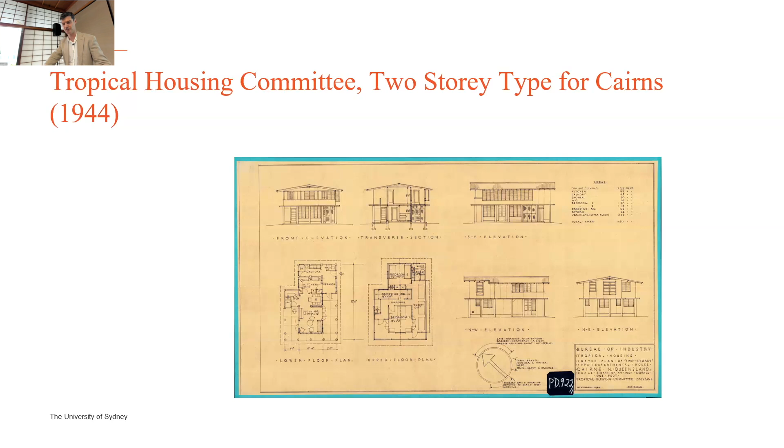This continued the racialized acclimatization agenda that came to the fore in the early decades of the 20th century, with the implementation of the notorious White Australia policy that placed greater weight on building construction and scientific research. The historian Warwick Anderson recently outlined that in the 20th century, modern and tropical were no longer antithetical, and that culture and racial assumptions about the tropics were changing due to technology.

The 1943 Tropical Housing Report placed its faith in scientific method to modernize and climatize housing and suggests the prefabrication of building and equipment units would create improved houses at lower cost, provided there was not undue emphasis on eye effect or patent protection, and that climate was taken into account.

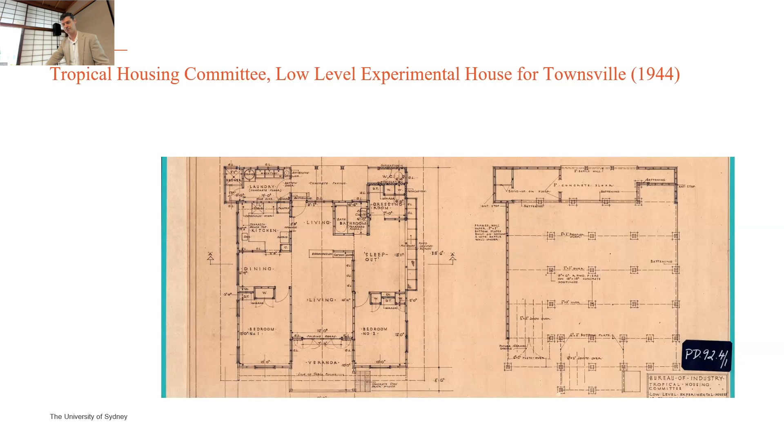Prefabrication is also championed by the Commonwealth Housing Commission, chaired by Leo O'Connor, who also formed part of the Queensland Bureau of Industry's Tropical Housing Committee. The commission also included prefabrication evangelists like Walter Bunning and architect Charles Howard. And Howard in 1943, while a member of the Commonwealth Housing Commission, actually suggested the creation of the experimental building station. It was really Howard who set in train that process, modeled along the lines of the Building Research Station to test and develop prefabricated buildings.

The 1944 report, the CHC's final report, expected that the scale of output required after the war, the lack of skilled labor, and the expanded use of factory production would all stimulate the reorganization of the building industry and increase the need for prefabrication. They considered prefabrication a viable solution for tropical and rural housing.

And what's interesting, I think, is that the proposed designs for standard houses at the back of the report in the southern part of Australia made no mention of prefabrication. Those for the tropics, subtropics, and rural areas were all expected to be prefabricated. So you can just see this up here. It's just notes. It's like based on prefabricated modular framework. So just that small note, I think, is of interest.

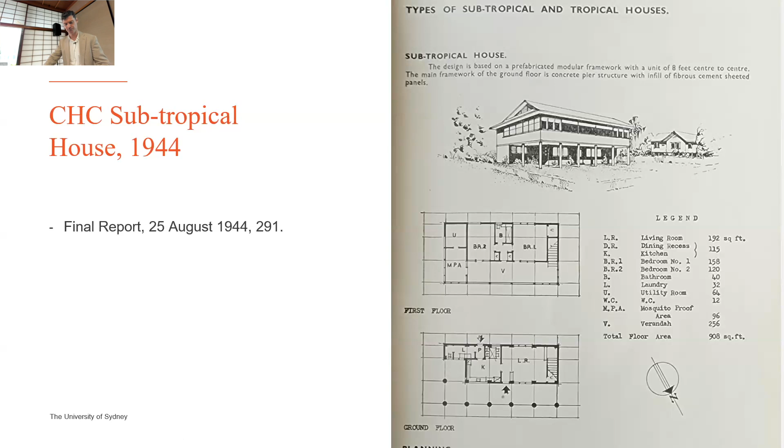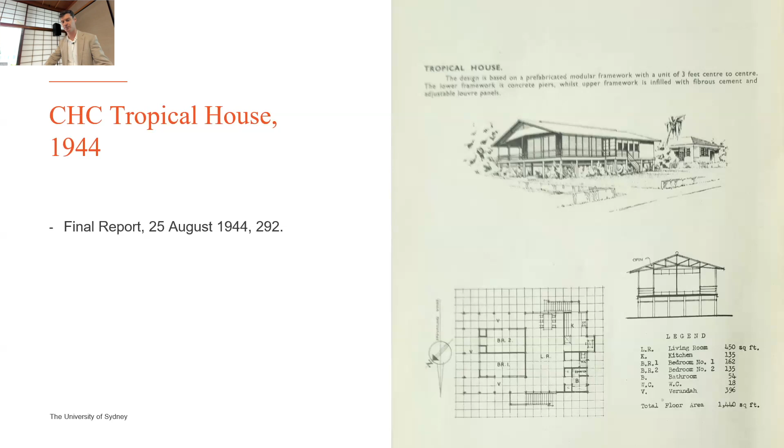What's surprising is that though the Queensland Bureau of Industry's work up in Queensland foreshadowed later work by the Commonwealth Experimental Building Station into developing climatic design factors for housing, and consisted of some of the more progressive members of the Queensland architecture profession, such as E.J. Weller, and even they roped in Carl Langer to do some of those plans that you saw earlier, they didn't place the same emphasis on prefabrication. Langer's subtropical housing did suggest, for example, the possible use of prefabricated building components, but his work seems to be much more about climate and lifestyle than on construction per se. So a bit of misplaced enthusiasm.

E.J. Weller, Jim Weller, who was at times the garrulous nominee of the Queensland chapter of the Institute of Architects, would have at first seemed to be a potential advocate for prefabrication, but if anything, subscribed to the view of the architect as a skilled tastemaker who'd facilitate a modern lifestyle without requiring major reform of the construction industry. An architect who trained in Sydney with Burley Griffin's associates, Weller was also a member of the Institute of Sanitary Engineers and had done a study of that.

In fact, some of his articles in architecture are worth looking at again. There's one that really goes into climate and health. And I think actually someone needs to put that in play with Carl Langer's work. I just discovered it the other week. And I think that'd be quite interesting.

And he was a proficient self-publicist who garnered considerable local attention in the press in the late 30s for densifying inner city sites in Brisbane and Townsville with small-scale apartments, such as these ones here. If anything, Weller highlights the interest in developing a local culture of architecture among Queensland architects and a mistrust of universal approaches. He was alarmed by the Commission's announcement of an experimental building program and thought it was rushing into solutions without probing the economic significance of any investigation.

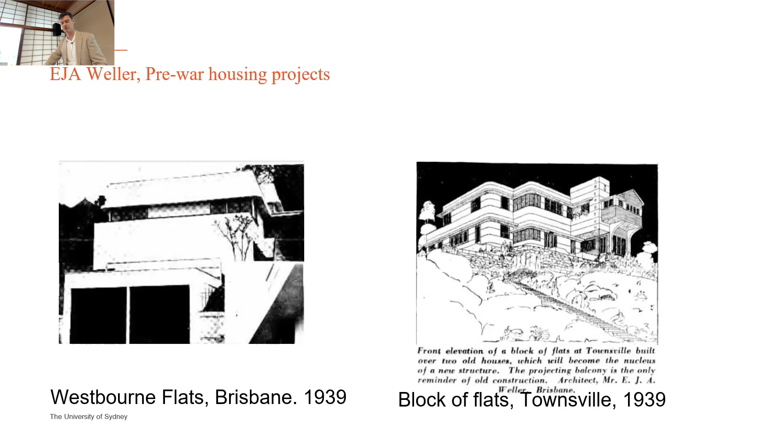Issues he thought relevant included local availability of materials and production potential, and the adaptation of war industry, at least in part, to the production of housing components. This is in 1943. Weller feared that prefabrication was being forced on the public and that few people would trade a loss of choice in the dwelling for a small saving in construction cost. Far from being a permanent benefit to civilization, as Bunning had claimed, Weller thought the rush to experimental housing solutions was misplaced enthusiasm.

But where did it kind of come about? Well, prefabricated houses were accepted by government as a quick fix solution to accommodation shortages. In Darwin in 1949, the Administrator of the Northern Territory, Arthur Driver, gave his reluctant support to purchase 100 Hawkesley houses, noting in a draft letter that "we do not like them, but we can see no other way clear to obtain the necessary number of dwellings, and the project should accordingly have our and the department's blessing."

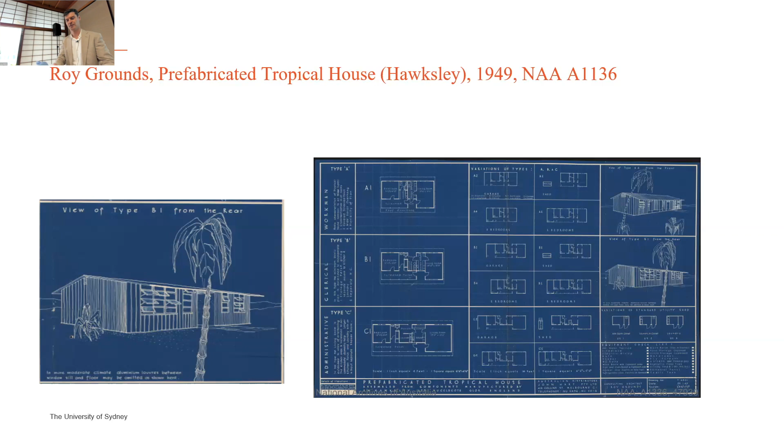End quote. Officials understood that the appearance of the buildings and the level of thermal comfort they provided were below what many in the community expected, but given the dire situation in accommodation, they were willing to compromise. And these are just some of the things in the file actually on the Hawkesley house. And here's another one. This was the Hawkesley house for Woomera.

Initially, the public also agreed. Hawksleys were also sent to Papua New Guinea, even though they were considered inferior to the other pre-cut homes, such as the R-type house, and weren't considered exactly ideal for tropical conditions. Their finish and appearance were acceptable, given the alternative of living in a makeshift dwelling.

One thing I think that's interesting, though, is that there seems to be little effort to galvanize public support for prefabs in Queensland and the Northern Territory. So while the Myer and Beaufort homes were displayed in Melbourne, and Harry Seidler's prefabricated House of the Future went on show in Sydney in 1954, I actually can't find any examples of prefabricated homes being displayed to the public in Brisbane, for example, during the 40s and 50s.

And even though there were exhibitions organised by the University of Queensland on the future of Brisbane in 1940 and '44, there was no mention that I can come across in the press, certainly, about prefabrication. There was a press article by the Minister of Housing in 1951 who pushed the need for imported housing, but it's unclear whether the public ever got to experience a prefab before moving in.

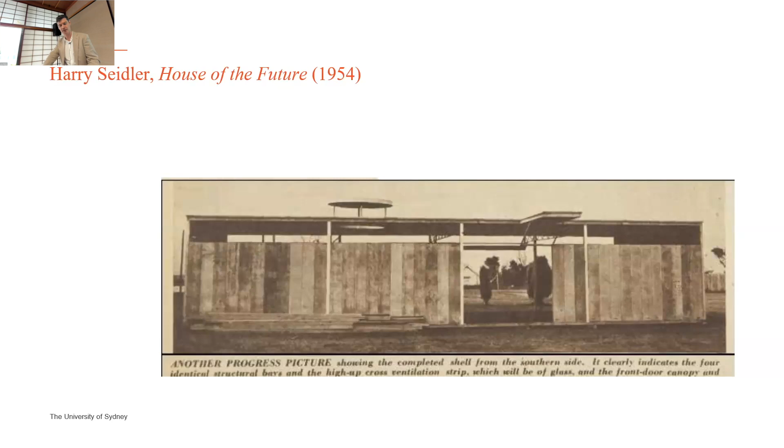So, disappointment. Many of the great plans for prefabricated buildings by state and Commonwealth housing agencies ended in disappointment. Certainly the claims that the factory-made houses would be cheaper and better performing failed initially to materialise. In 1942, Bunning had suggested that a prefabricated house could be built for £350, yet 10 years later, Hawkesley houses in Darwin cost £5,145. Even allowing for inflation and the cost of site work in remote locations, this was far above the standard cost of housing elsewhere at this time.

The importation of prefabricated dwellings from Europe in the early 1950s by the Queensland Housing Commission was also considered a debacle. The prefabs at Zillmere, north of Brisbane, became a battleground between state Labor and federal Liberal parties in 1952. There were accusations of poor workmanship, defective materials, and householders getting dysentery. Alans Vernooy, the son of the main contractor for the Dutch houses, considered the concrete Dutch house at Coopers Plains to be a housing debacle.

Some of the problems that emerged include poor site infrastructure, materials unsuited to local conditions, and poor workmanship. And I think this thing about site conditions is something that often gets missed in discussion. It's one thing to have the prefab house, but you often needed a contractor to actually set up the place, and that often created extra expense and trouble.

In 1951, in the northern Brisbane suburb of Zillmere, there was a development of French-made prefabricated dwellings for the Queensland Housing Commission. Well, there were issues about site infrastructure, and there were examples actually given of raw sewage being carted across the suburb and dumped into an open sewer where it built up and caused considerable health risks. Site drainage was so poor that the suburb was also considered a dengue risk.

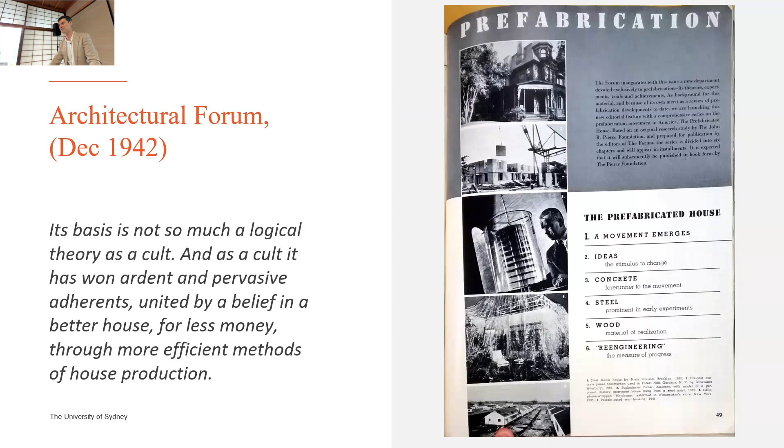Yeah. So I just want to preface this, that this research is really at its early stages, and I'm using this paper to test some connections that I hope to explore later on with more detailed archival work. And so there's a bit of a disjuncture between some of the images on my slides and the housing policy that I'm introducing, but it gives you a sense.

The Commonwealth Government's journey of reconstruction and nation building after the Second World War contributes to economic prosperity, and although the 1950s were punctuated by economic fluctuations, this trajectory during the late 1940s and 50s in part generates a political and wider social emphasis on house ownership as a method of economic and cultural securitization that inscribes itself in the national imagination.

The detached suburban house built with climate considerations and adapted to local environments gained momentum as the ideal housing type for Australian citizens, and by extension becomes adopted as arguably a defining attribute of Commonwealth citizenship and definitely a public fixation. In this period, the hazy notion of the Australian dream takes flight and becomes an ongoing magnet for cultural commentary, both affirmation and criticism.

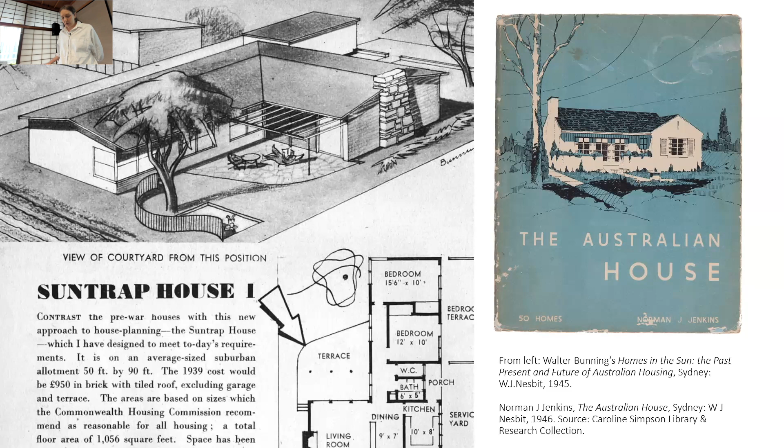This short presentation introduces the conceptual framework and key questions for a larger research project that interrogates the political narratives and motivations encircling the Commonwealth's involvement in housing research and provision in the immediate post-war period. This larger project aims to explore the colonial underpinning of housing histories and the political apparatuses behind the generation of housing ideals, and how this impacts design research undertaken on behalf of the Commonwealth and its dissemination into the wider architectural profession in subsequent years.

By situating the Commonwealth's directives to address the housing crisis emerging in the final years of the Second World War in the context of the growth of owner-occupied housing in spreading suburbia, the research aims to consider the relationship between housing and colonial emplacement, and how this emerged through government-sponsored construction innovation slanted towards domestic architecture.

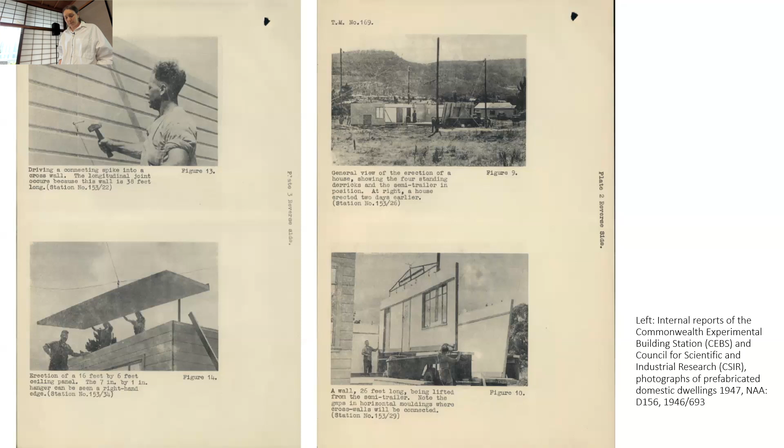What the broader project hopes to explore is the scale of involvement the government had in the adoption of house ownership as an aspirational aim, and how this possibly informed the design outcomes it produced. During the period from the late 1940s into the 1970s, the federal government both produced and financed a large amount of this type of suburban housing stock as part of public housing efforts.

However, it's important to note that the role of the nation state in the expansion of owner-occupied housing, specifically the level of its orchestration and interference in the widespread endorsement of home ownership aspirations, has been heavily debated by political and social historians such as Alastair Greig.

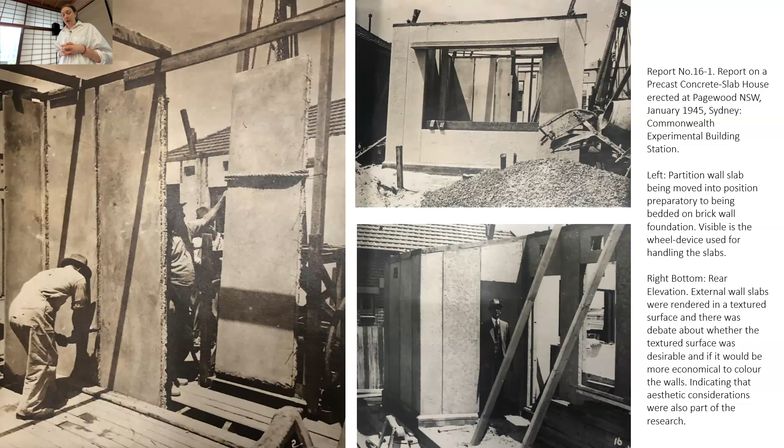But Commonwealth government policy did aim to encourage certain housing tenure types and the promotion of a mono-tenure system with owner-occupied at the centre, I suppose, undergirding these larger housing agendas surfacing from the Commonwealth, particularly from the mid-1950s onwards, with the renegotiation of the Commonwealth State Housing Agreement in 1956.

The Commonwealth Housing Commission was established in April 1943 to address the future housing crisis and the diminishing quality of Australia's housing stock. It operated as a commission over 1943 and 1944, set up with two rather broad primary aims: to present the housing position in Australia and to inquire and report on the future housing requirements.

Generated as one of three commissions of inquiry from the Department of Post-War Reconstruction that was established in 1943 with Chifley as minister, the others being the Rural Reconstruction Commission and the Secondary Industries Commission. The CHC was an accumulation of departmental recommendations and a real network of bureaucracy, namely the 1941 Interdepartmental Committee that advised on reconstruction, identifying housing as a major post-war concern stemming from the Depression.

The CHC consisted mainly of architects, and Orion has already outlined this a little bit, but John Scarborough Gawler, a former lecturer in town planning and architecture at the University of Melbourne, and Charles Vincent Howard, an architect in the Department of Interior. The Commission's executive officer was Walter Bunning of the later firm Bunning and Madden that practiced as a partnership from 1946.

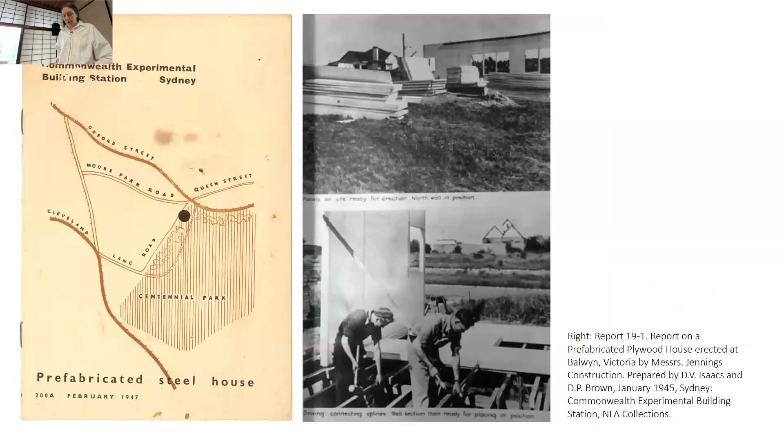As part of its recommendations, the Commonwealth Housing Commission proposed the creation of the Commonwealth Experimental Building Station, founded in 1944, set up to foster immediate and more experimental solutions for the post-war housing shortage, trialling cost-effective on and off-site fabrication methods and new construction technologies in collaboration with industry partners such as Jennings Construction and Stewarts and Lloyds.

A decline in traditional residential construction materials from the war-orientated industries meant that part of the CEBS's program was developing low-cost prefabricated steel and concrete houses as viable alternatives.

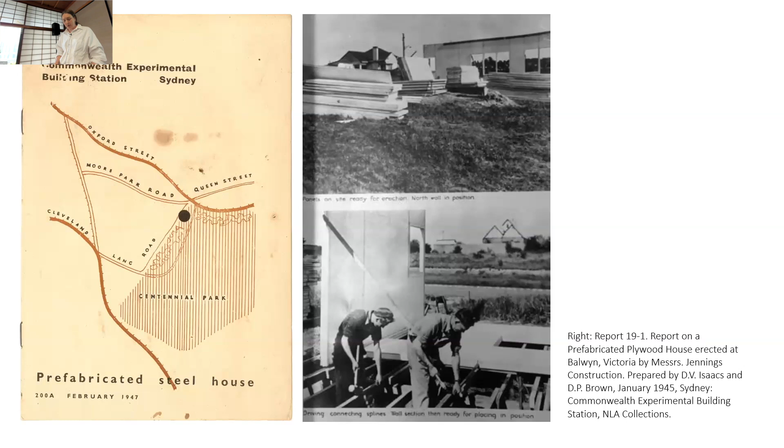By discursively examining the Commonwealth's interest in housing research propelled by the post-war housing crisis, next to the development of housing ideologies, in particular the entrenched spectre of home ownership and its long-lasting effect on housing trajectories, this research raises questions about the aims of the Commonwealth-produced housing, as well as the politicisation of the domestic sphere, offering a platform to interrogate how narratives of nation building curated a particular framing of national identity as positioned in parallel to the ideas and preconceptions about the political, social, and aesthetic role of housing in Australia.

Raising the question of how the design innovation the Commonwealth Experimental Building Station fostered is connected to the wider political climate of the 1950s, namely the influence of the Cold War and its impact on the government's framing and delivery of housing. The link between the politics of home ownership, the shadow of the Cold War, and the building of a constituency for the Menzies government's brand of conservatism in the 1950s has been investigated by John Murphy.

And the aim is to situate these established discussions in relation to the evolving program of the Commonwealth Experimental Building Station in the 50s. It is conceivable that there are links to be made between the national economic development, as Murphy argues, in terms of self-reliant industrial facilities in readiness in the Cold War, and the expansive immigration programs that were also part of this, to bolster labour, I should add, and how this may have influenced the type of projects the CEBS was interested in and undertook.

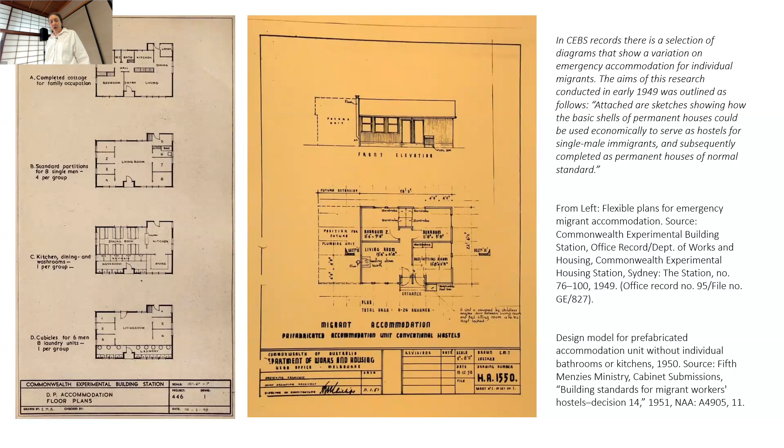To examine how the types and forms of Commonwealth housing and who gets priority to access are intrinsically linked to the then government's social engineering and population control measures that were introduced after the Second World War. For example, seen in how assimilation policies and processes influenced the adaptation and construction of accommodation allocated to migrants and refugees arriving to Australia as part of various assisted passage schemes. That's it.

This case study of post-war prefabricated housing concerns the naval cottages erected at Lower Georges Heights in Sydney, erected for the married naval personnel involved in the post-war National Service Training Scheme. This case study is based on our heritage assessment study and detailed research report carried out in 2003, 20 years ago, for the Sydney Harbour Federation Trust, with research by Terry Cass and Noni Boyd, which was subsequently provided by us to Al-Shabib and Ridgeway for their article in Fabrications in 2020.

An 8th cottage was erected at Upper Georges Heights, and Miles will show you an external view of that cottage at Upper Georges Heights. 5 of the 7 Middlehead Road cottages were slated for demolition in the Trust's management plan, subject to further investigation, and our 2003 study was that further investigation into their possible significance. The 8th cottage of the same type at Upper Georges Heights was not then under immediate threat of demolition.

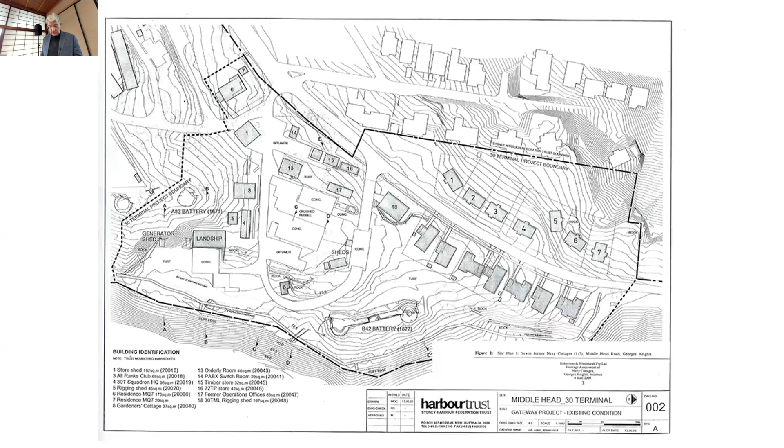Our assessment report contained a detailed history by historian Terry Cass of the post-war Commonwealth housing mission to Europe and the USA, investigating prefabricated houses. Repetition of that part of the study is beyond the scope of this talk, but the history section of the report can be made available for those who are interested, as it gives a detailed account of the Commonwealth housing mission, as well as correspondence between the government and the Åmåls Sågverks Aktiebolag, or ASA, the Åmåls sawmilling company.

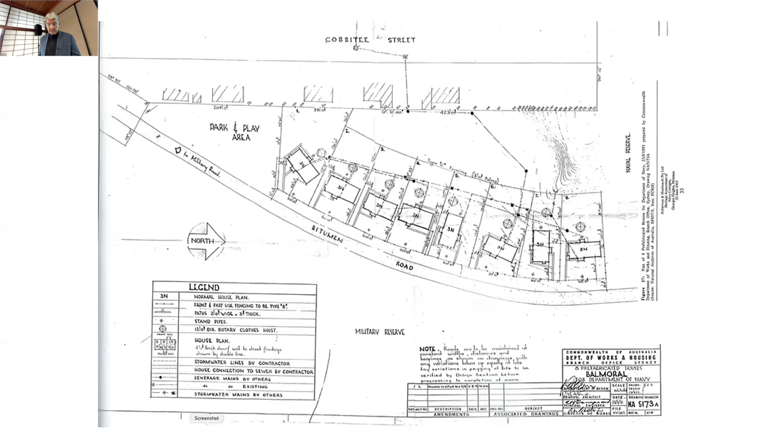Now, within the legend of that drawing, there's a thumbnail sketch floor plan of the typical house to be erected on the site. This plan was identical to the floor plan of the houses as erected. However, there was no indication on this drawing of the origin of the house's design.

An important discovery was the Department of Works and Housing drawing HA1671, dated April 1951, in other words, preceding that previous drawing. That consisted of 4 sheets of drawings depicting the plans and elevations of 11 prefabricated house types that were sourced from England, Sweden, Norway, and Australia.

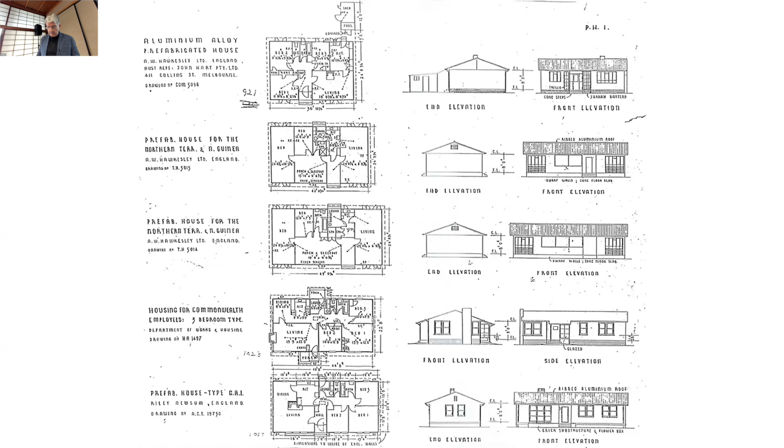This sheet 1 depicts English examples. It depicts also the Commonwealth Works and Housing example, and at the bottom, the English Riley Newsum type CA1 house, for which the Georges Heights cottages were mistaken. Sheet 2 has yet more Hawkesley houses from England. Sheet 3, Australian examples and the Swedish ASA house. And sheet 4, a Norwegian house, another English house, and a further Australian example.

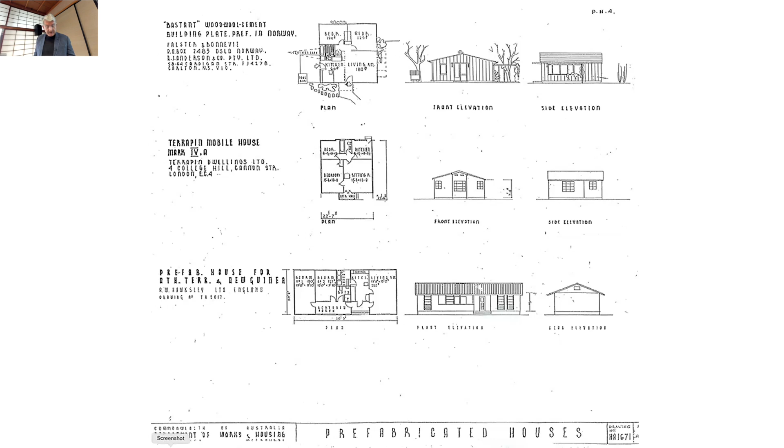These 4 sheets of that drawing number included 2 floor plans identical to that shown in the legend of the Naval Cottages site plan of May 1951, and another very similar plan. And I've brought them together on this slide. So the top one is the Housing for Commonwealth Employees, 3-bedroom type, Department of Works and Housing drawing HA1497. And it's worth noting it's got 8-foot ceilings. I won't give you the dimensions, but it's got 8-foot ceilings, so remember that.

The central one is the Riley Newsum CA1 house with reference to their drawing ACT19750. It's also got 8-foot ceilings. And sheet 3 of the multi-drawing set depicts the Åmåls Sågverks Aktiebolag house with reference to drawing number 5493. And this house was depicted with 9-foot ceilings. Whilst the plans are identical in layout, the dimensions are different. The Commonwealth house is smaller in length and width and has 8-foot ceilings, compared with the ASA house's larger dimensions and 9-foot ceilings. The Riley Newsum house is longer but narrower than the ASA house and also has 8-foot ceilings.

So this drawing series was the first documentary evidence of the possible correct origin of the Georges Heights cottages, as the Riley Newsum house depicted on the drawings was similar to, but still sufficiently different in detail to the Georges Heights houses to be discounted as correct origin. And as I mentioned earlier, the corner window, placement of the fireplace, etc., is very different in the top and the bottom example compared with the Riley Newsum in the central example.

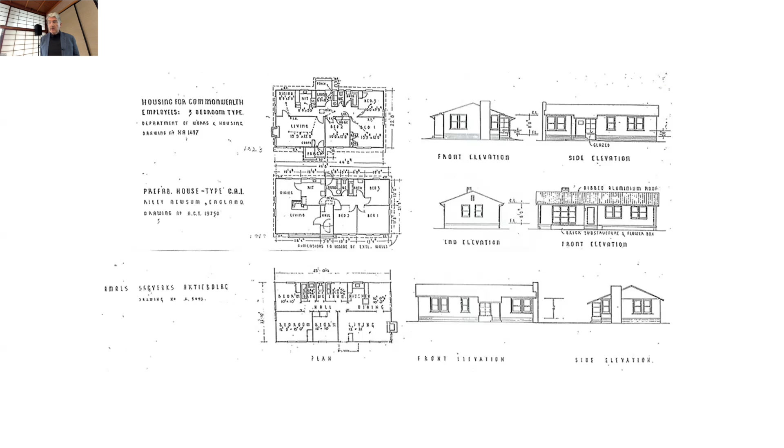Our measured drawing of one of the naval cottages gave plan dimensions closest to the dimensions of the Commonwealth Works and Housing House. The naval cottages were approximately 44'8" by 22'9" with 8-foot ceilings. The same length, but 1 inch wider than the Commonwealth House and 1 inch narrower than the ASA Type 302.

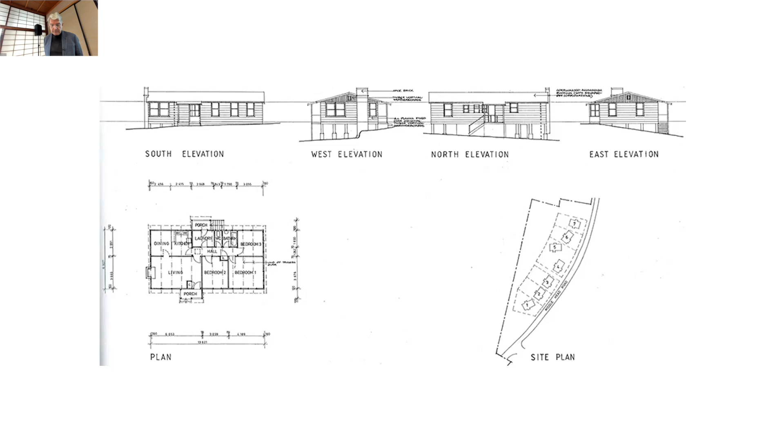However, this poses the question as to who designed the cottages. Was the house an ASA original design and the Commonwealth Plan an alteration of the size of the house to reduce cost? Or was the house designed as a collaborative effort by ASA, as represented in Melbourne by the Åmåls company, and the architects of the Commonwealth Department of Works and Housing, also then based in Melbourne? Our 2003 research did not progress beyond posing this question, and subsequent research that we have seen has not progressed beyond our supposition that the design was the result of collaboration, or of at least critical input between ASA and the Commonwealth architects.

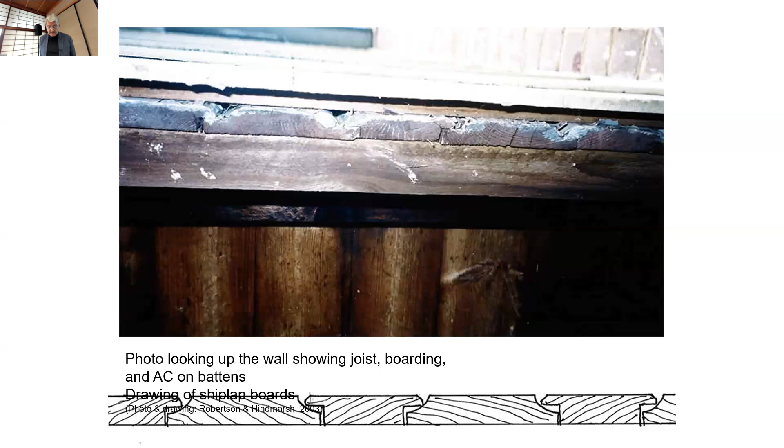The condition of the interior of some of the cottages was not good due to vandalism, but the damage had the benefit of allowing us to investigate some of the normally concealed parts of the structure of the cottage. The walls had double studs approximately every 1.2 metres, which indicated a possible panel system of construction of those walls, as these double studs did not align with openings or internal wall junctions where you would normally find double studs. The walls were sheeted behind the exterior timber boarding with bitumen impregnated building paper or sarking, and they were sheeted on the inside surface with a masonite-like hardboard interior wall lining. There was no bulk wall insulation.

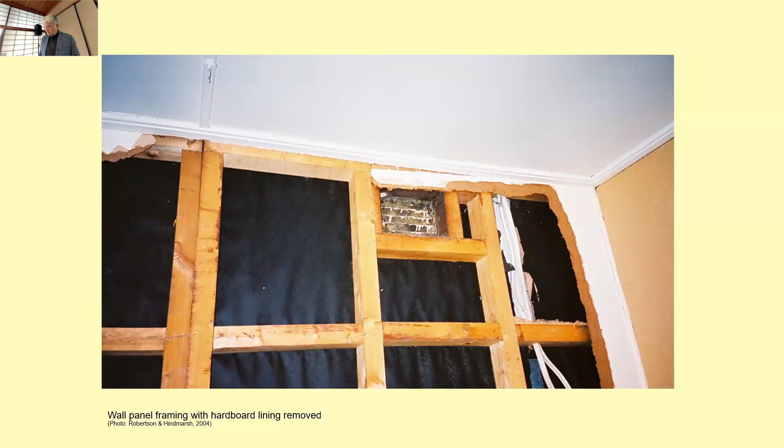Now, these are the before photos, and Miles Lewis showed you the after photos. Cottage number 5 in Middlehead Road even included the original kitchen cupboards with fold-out ironing board and exhaust hood built into the cupboard above the stove, which we considered to be unusual for government-provided housing in the early 1950s. Simple tubular Bakelite interior door handles were extant, and their fully mortised locks had curved fore ends. The original exterior door handle and lock still survived on the well-built heavy front door, which was again of greater thickness and higher quality than in similar post-war government housing, due to the inclusion of cold climate insulation within the door, as we discovered later.

The door hinges also hinted at a non-Australian origin with their curved corners. The hinges also contained a stamp, which is not clear in this photograph, but they're there, of an interlocking V and upside down V in the letters ASSA, as well as Sweden.

ASSA, or ASA, was established in Sweden in 1881 by August Stenman, his initials AS being reversed to create the palindrome ASSA, and joined with the Finnish firm Abloy in 1994. ASSA ABLOY still supplies the Australian market. The inscription is proof that the hinges are Swedish and indirect evidence that the houses could have been of Swedish origin.

The documentary evidence of the ASA houses as drawn in the Commonwealth Department of Works and Housing comparative drawing, the 4-sheet drawing, and the physical evidence of the extant original door furniture and hardware, and the kitchen cupboards enabled us to conclude in 2003 that the houses were, more likely than not, prefabricated houses made by the Swedish ASA company.

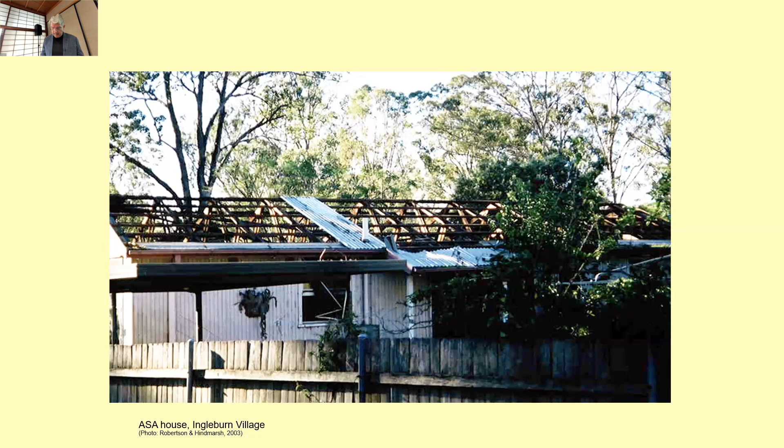The Sydney Harbour Federation Trust conserved 4 of the Middlehead Road houses and demolished 3 of them, 1 at the south end and 2 at the north end, to increase the image of bushland when entering the road down the site. And it has to be remembered that we were fighting a preconceived idea that the site should be returned as much as possible to its original pre-European, pre-military state, which was at loggerheads with its cultural significance.

Whilst undertaking our World Wars I and II site study in 2005 for the New South Wales Heritage Council, we came across more ASA houses in the Littleton area of Lithgow, west of the Blue Mountains. They were erected as part of the post-war staff housing for the Lithgow Small Arms Factory, and 11 of them still remain interspersed with other types of prefabricated or pre-cut houses that we did not identify.

Now, as I mentioned earlier, as an aside, Lithgow is also the location of an important collection of very small asbestos cement-clad duration cottages, which, as I said in question time before, were erected for the duration of World War II for the armaments workers. So there's quite a large collection in Lithgow, and there's also a collection in Orange and Bathurst, as well as St Mary's in Sydney, near the major armaments factory that used to be there.

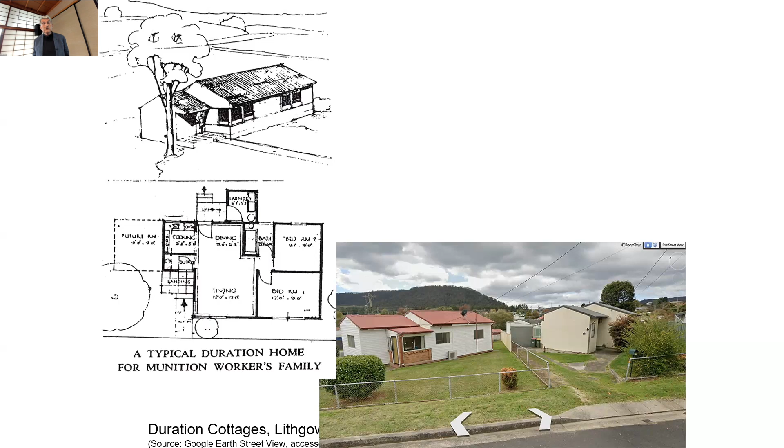The Orange and Bathurst areas are now heritage listed as statutory heritage conservation areas, so they remain and are still being used and loved, but these ones in Lithgow aren't in any conservation area.

A few years ago, we uncovered additional documentary evidence in the form of the English language ASA catalogue. The managing director of ASA, Eva Nordstrom, stated in the catalogue's foreword that ASA had established a company in Melbourne, Åmåls, which we've heard of already, to assist the Commonwealth in meeting the post-war housing needs, and that the company was able, and this is important, to assist clients by working with the client's preliminary sketches to achieve a finished product using the ASA pre-cut or prefabricated systems.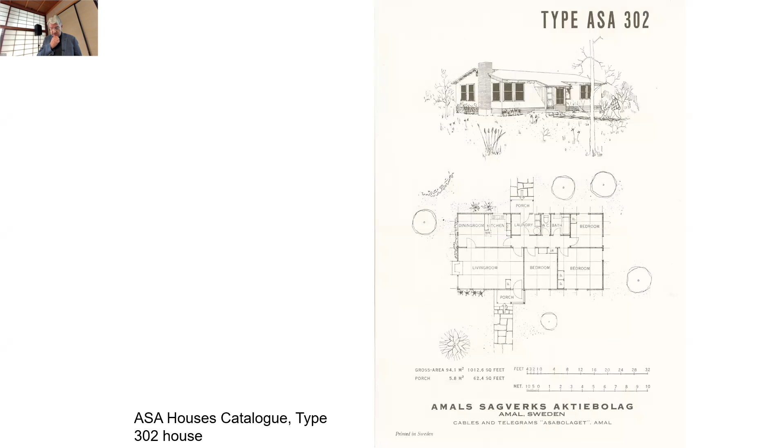Almost there. The ASA catalogue, in addition to floor plans and perspectives of some of the company's standard house types, such as this A3, so the ASA 302 used at Georges Heights and elsewhere in Australia, contains a wealth of detailed technical information.

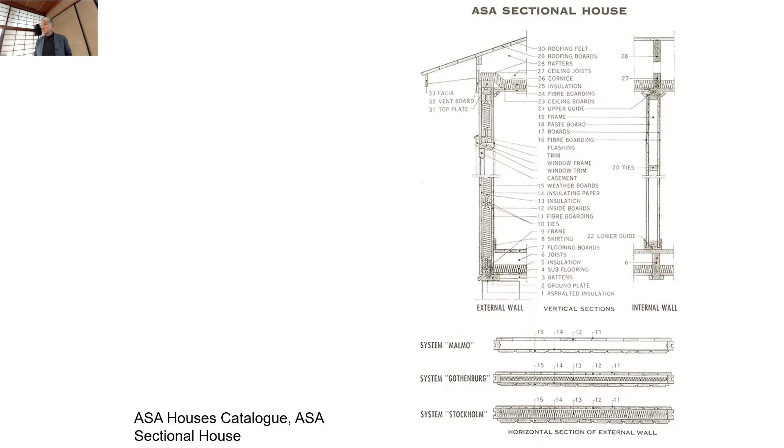And it must also be mentioned as an aside that this catalogue did include details for the North American market, specifically to comply with the Department of Housing and Urban Development in America, so they were aiming at the North American market as well.

Oh, and before I go on, it was also worth mentioning that the National Archives files contain correspondence regarding the treatment of the timber on these houses, because these houses were built out of softwood. The joists were softwood, everything else was softwood above the bearers. The bearers and the brick piers were provided by the local contractor here in Australia, and the rest came in a flat pack from Sweden. So they impregnated their timber with hylosan to stop insect attack and decay.

In 2003, 50 years after the house's construction, we noted the fungal attack on the softwood floor joists, probably explained by the fact that hylosan had an effective life of only 20 years. The chemical was banned in the 1970s, and the residues of that chemical were found underneath the houses.